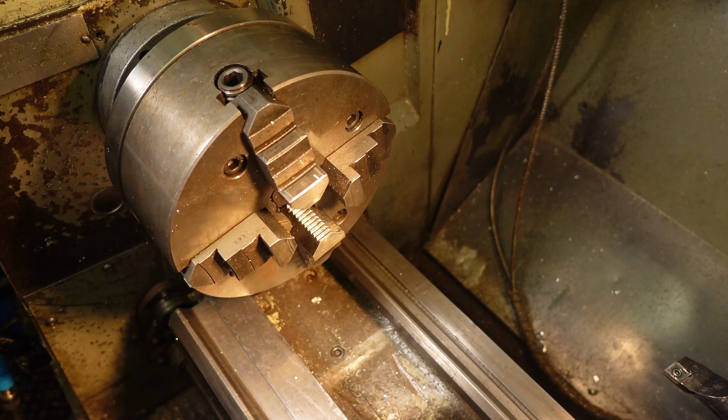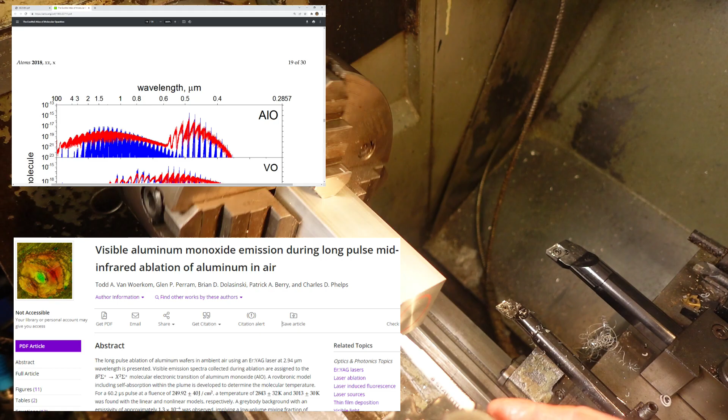Hey Amy, I need to remove a slug of material from a block of aluminium, but machining it all into chips seems wasteful. I've been reading these brilliant articles about laser ablation and aluminium monoxide vapour absorption with green lasers. This is going to be a sketchy quantum setup. I can tell already.

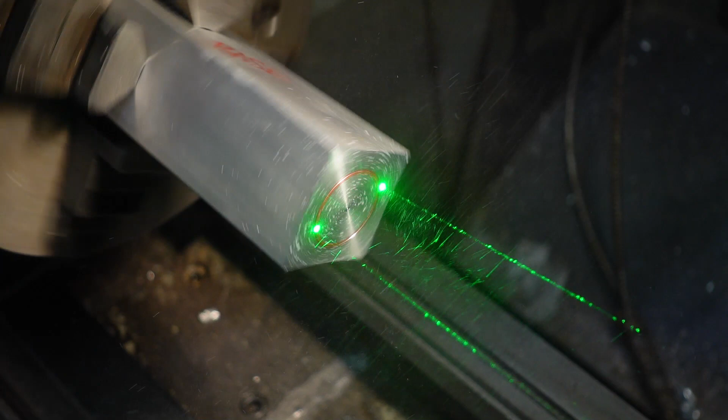Looks like it's working, but how do I remove the slug? I found something by Venkman, Stantz and Spengler from 1984. They say you mustn't cross the photon beams because it'd cause a total photonic reversal. That would be bad. I'm fuzzy on the whole good-bad thing. What do you mean bad? Try to imagine quintillions of atoms stopping instantaneously, causing violent rips in space-time. Sounds great! Realigning second beam now.

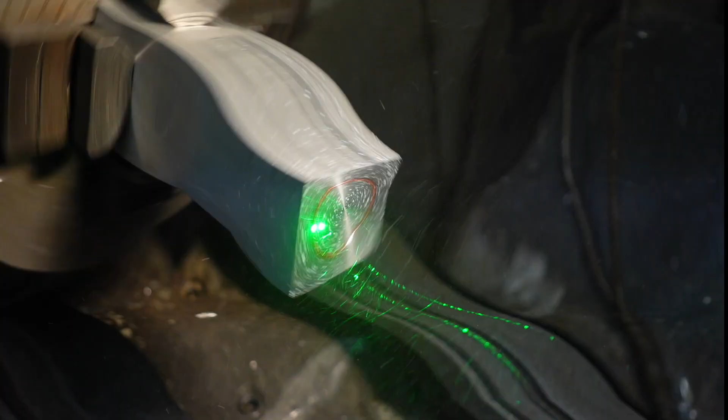What happened to the lights? Do I look like an electrician? Well, yes. Gender expectations, eh? There you go.

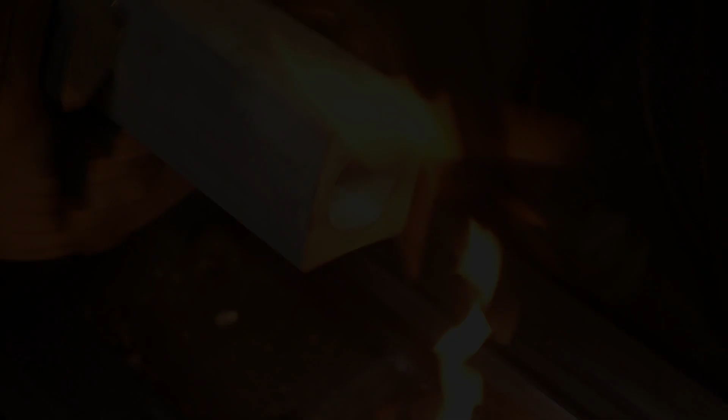Hey, careful, that'll be extreme. Ow! Hot! You could have warned me. The first aid kit's in... oh wait, you used it last time, so I don't need to tell you.

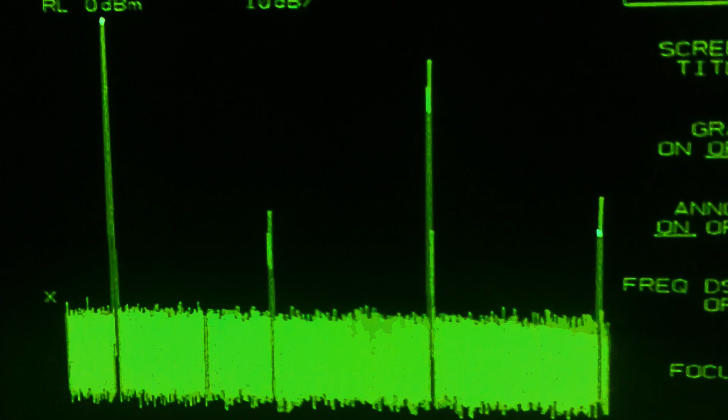Microwave transmitters generate some unwanted harmonics, so if I transmit on 1.3 GHz, I'll also put out signals on 2.6, 3.9 and 5.2 GHz. To block them, I need to make a low-pass filter.

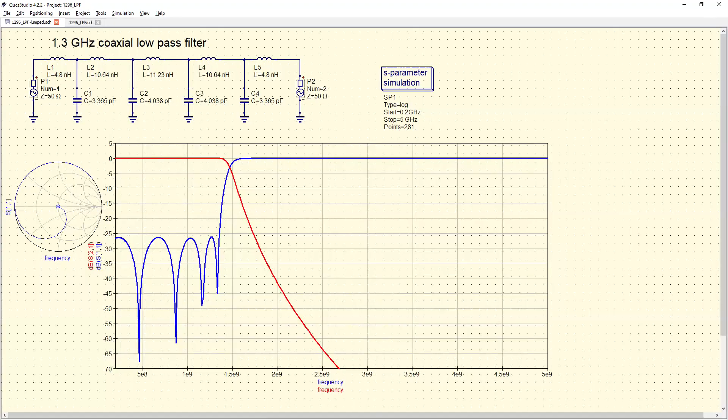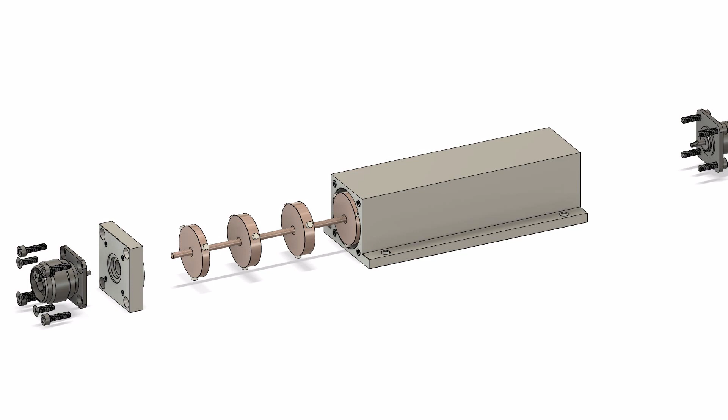At these frequencies, magical things happen with very simple geometries. The filters I'm making consist of an aluminium block with a machined bore. Classical low-pass filters use a set of inductors connected in series with capacitors to ground. At microwave frequencies, a thin rod in a tube looks like an inductor, and a fat rod in a tube looks like a capacitor. So we can use the normal Chebyshev design approach to get the values for the inductors and capacitors, but just use rods of the right sizes inside a tube.

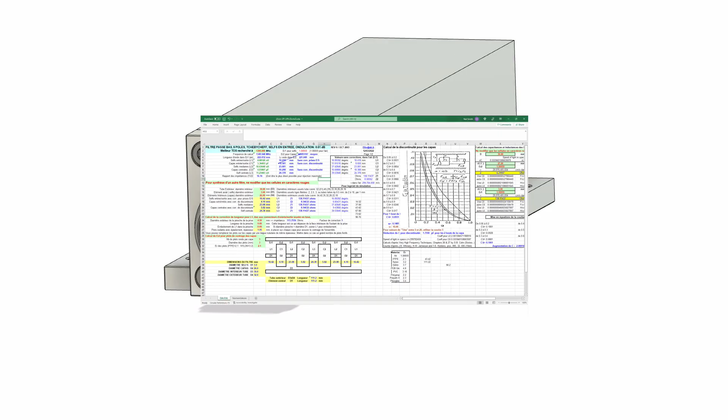There are end effects and fringing fields to deal with, but luckily Dominique F1FRV came up with a brilliant Excel sheet that does all the corrections. So all a humble microwave machinist has to do is make some discs of precise diameter and thickness, solder them to a rod of a suitable size, bore out a hole so there's a bit of an air gap, fit some lossless spacers and attach sockets to the ends.

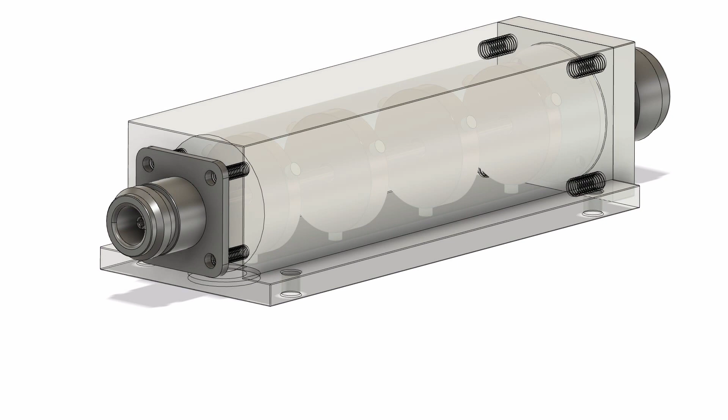Being of a somewhat nervous disposition, I put the dimensions into a Fusion 360 CAD model so I could check everything fitted and looked right. Also, it looks swoopy and cool and spits out dimension drawings for those of us not blessed with a Haas CNC machine.

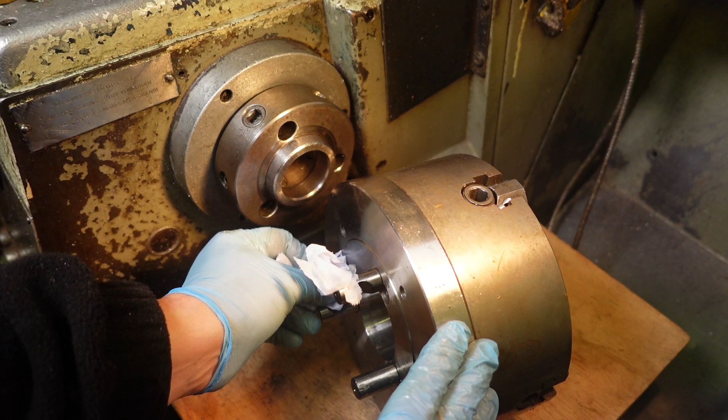I need one of those Lego cranes that Adam Booth uses. It'd be brilliant. Amy, I know for a fact that your voice synth is unable to snigger, so don't even try.

These camlock chucks are a bit of a faff to change over, but they're very repeatable and they allow full power in reverse, which is nice.

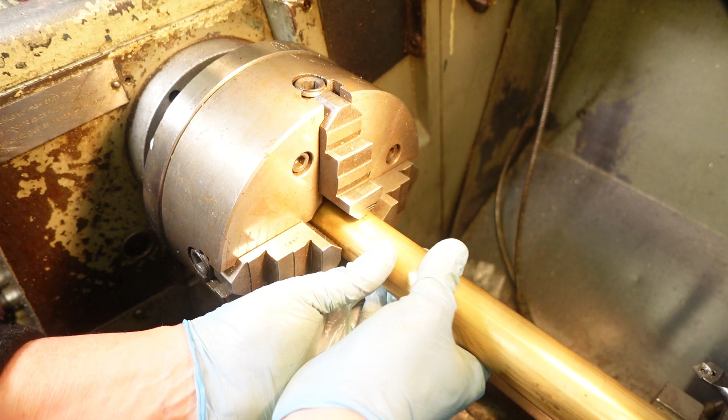One of us forgot to order some 30mm brass bar for this job, so I'm having to waste some bigger stuff. A new bar of the right stuff will be here in 3 days. Perhaps.

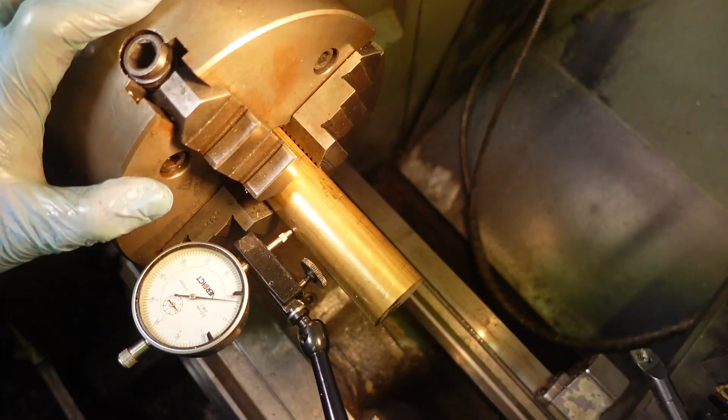It's probably not that important to get this bar centred up, but it's a big lump to have wobbling around, and I need the 4-jaw alignment practice in case I ever make it to the Bar Z bash. Collets are just too easy. Those ER40s are a gateway drug. I'm going to end up as a 5C user skulking on street corners trying to score some rubber flex. My name's Neil and I'm addicted to collets, but I can handle it.

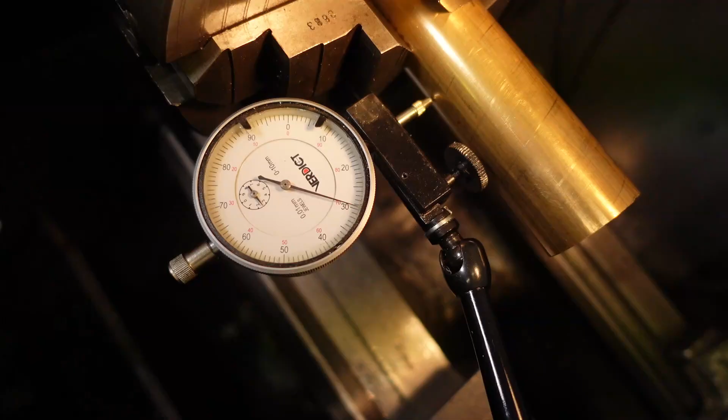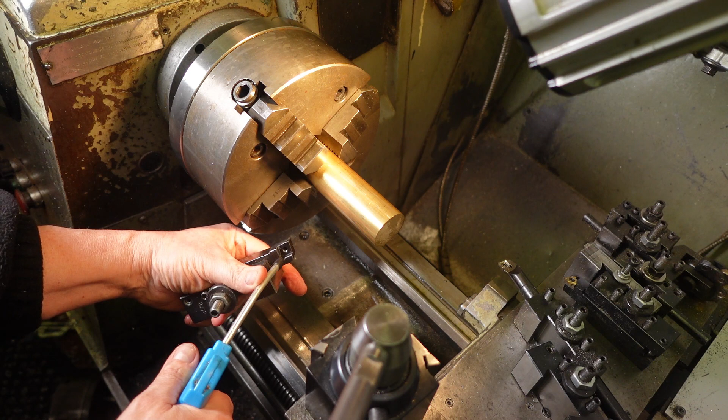Force of habit means I inspect my inserts with a jeweller's loupe before committing violence against metal. This one was janky as a janky thing, so I flipped it to give me a fighting chance of a decent finish. Talk about living life close to the edge. That's me breaking one of my cardinal rules and removing the insert screw over the chip tray instead of my usual nice safe magnetic bowl.

Shop looks more like a flipping film studio every day, nowhere to move.

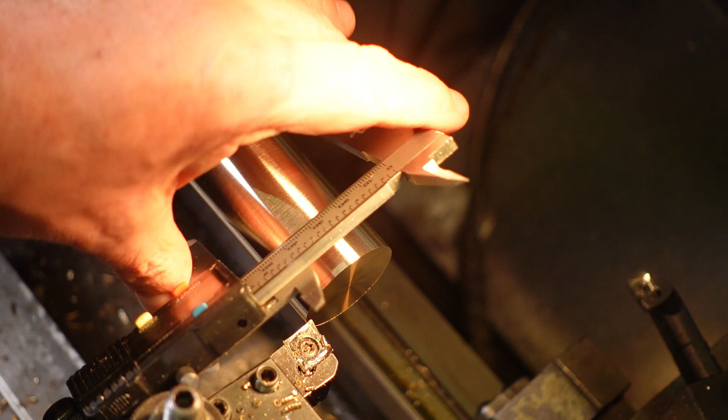These YG1 aluminium high rake positive uncoated inserts that I get from Cutwell work splendidly for finishing brass, but they leave a rotten finish when you take more of a cut. However, the chips are chips and not powder that sprays everywhere, so I can put up with it.

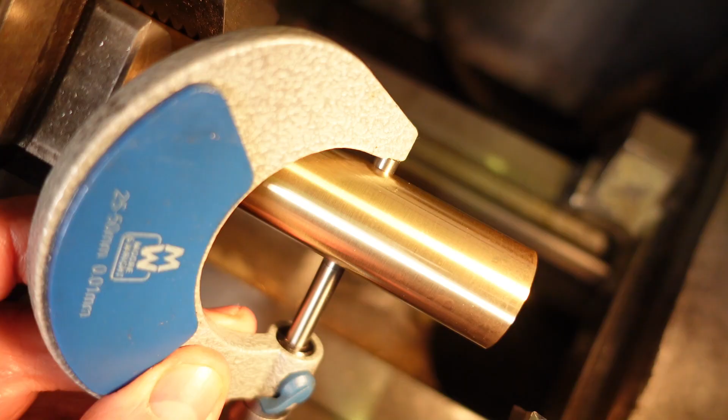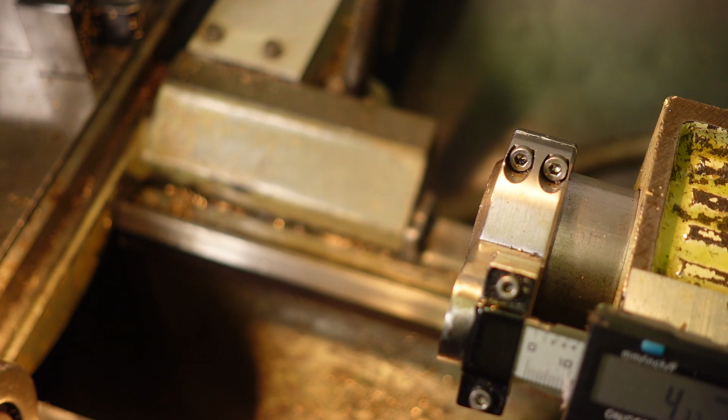Right, that's nicely on dimension for the diameter. Now I need to make the 3mm bore. Starting with a centre drill, then a 2.75mm cobalt jobber, and finish with a 3mm straight flute reamer.

This 3mm reamer's nothing special, it came in one of the better Chinese kits.

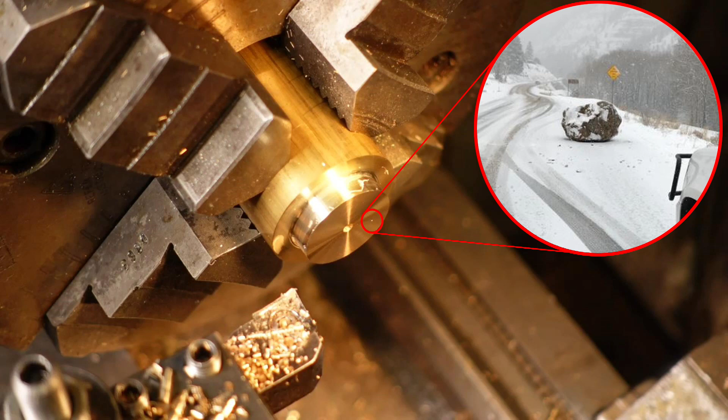First steps to clean the discs and chuck face with acetone, then apply a few dabs of high viscosity cyanoacrylate superglue and stick the disc to the chuck.

Someone's going to be thinking, how does he know how thick the glue line is? Well, dear reader, I measured it. I faced the glue chuck and zeroed the DRO, then stuck an oversized disc to the chuck, machined it to 6.00mm, then removed it from the chuck, made sure it was clean, measured it with my best micrometer.

Repeated that 3 times, each time 0.5mm less, because I'm like that. The average size of the disc was 22 micrometers less than the DRO measured offset. I tried to use roughly the same amount of glue and pressure each time. One day I'll find that fancy CA glue that contains glass microspheres that give a precision bond line thickness.

Time for some propane nightmares then. CA glue melts at less than 200°C and leaves the workpiece totally clean. All the residue stays on the chuck. Most convenient.

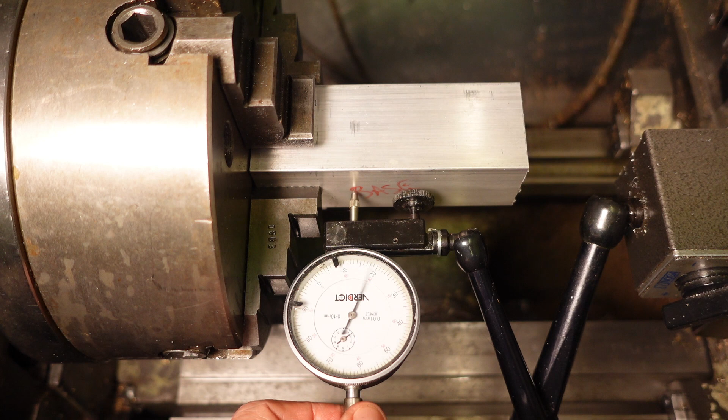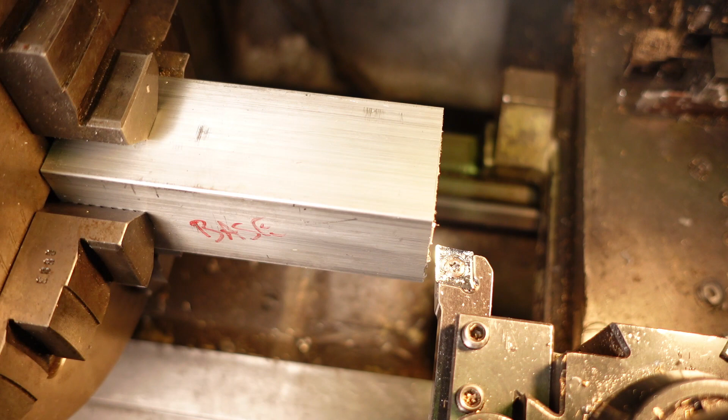And exhale. Nearly nodded off again there. I'll square up the end of the block to give me a reference surface to work from.

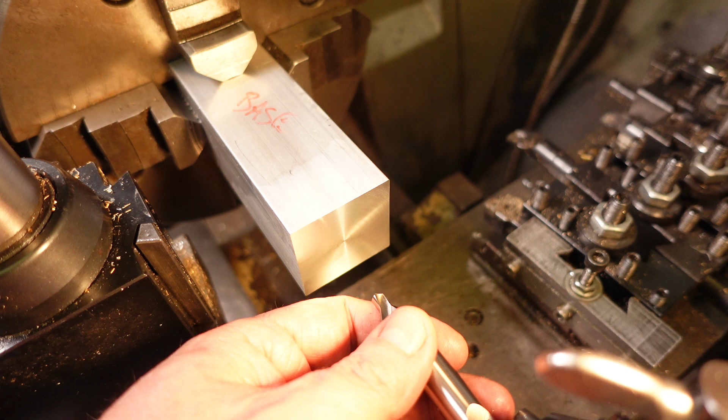I'm using this huge centre drill because it looks comedically large and makes me ridiculously cheerful. With the current state of the world, that's pretty impressive for a pointy lump of machined steel.

The finished size of the hole in the end of the block needs to form a 50 ohm coaxial transmission line with the extended end of the central copper rod and the solder spill. There's a logarithmic relationship between the surge impedance and the ratio of the inner and outer diameters. It turns out the hole needs to be 7.1mm.

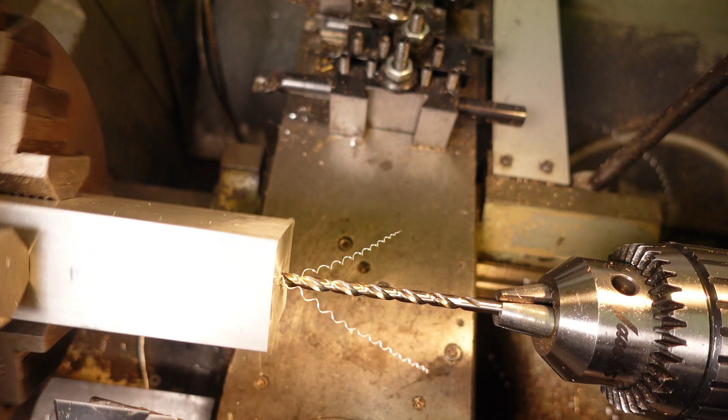I'm using a long series 6mm HSS Cobalt drill that I bought from Drill Service of Horley. It's not quite long enough to do the full depth, so I have to resort to some sketchy chucking later on. If that sort of thing gives you dyspepsia, you should probably avert your eyes. Oh, the horror.

Neil, that was a bit silly, wasn't it? Way ahead of you for once, Amy.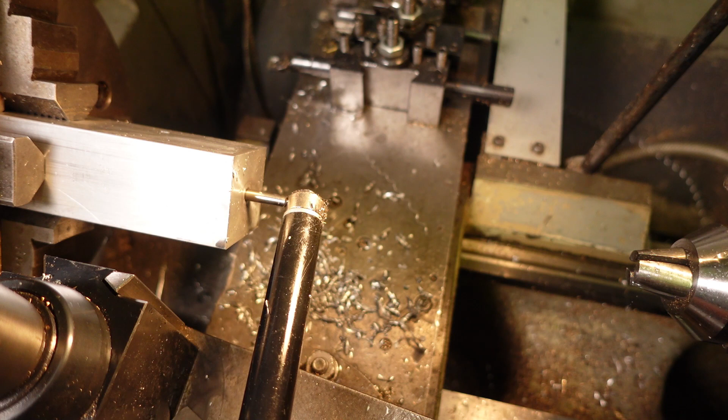The finished internal diameter is 30mm. This is a 5/8 UNF tap drill, 37/64, around 14.6mm. It's long enough, but of course the tailstock quill travel's 20mm too short, so I'll have to take special measures.

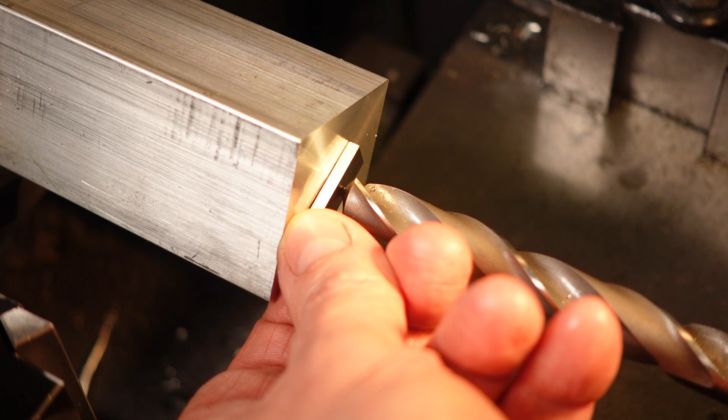Once again I'm using the cheap 3mm gauge block to set a reference position for the tool so I can measure the depth of the hole using my tailstock DRO. I zero the DRO scale with the block in place, then because I'm a bear of very little brain, I move in 3mm and zero it again so the tip of the tool's flush with my reference surface and I don't have to suffer my ultimate nemesis, mental subtraction.

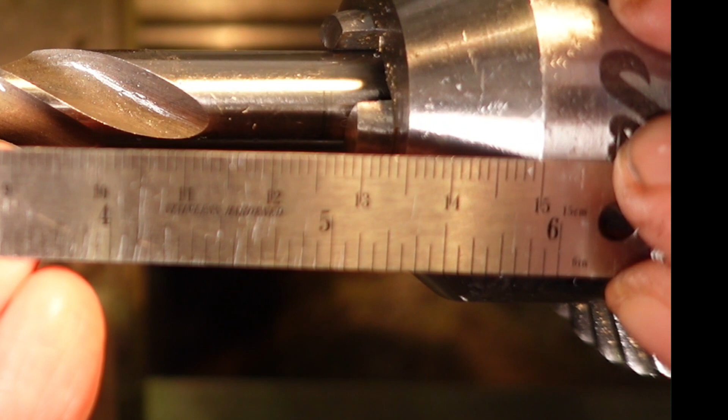At this point I put the gauge block in again and measured the distance from the workpiece reference face to the edge of the taper on the chuck. Exactly 150mm. Convenient. Could have been planned. Planned, lol, never.

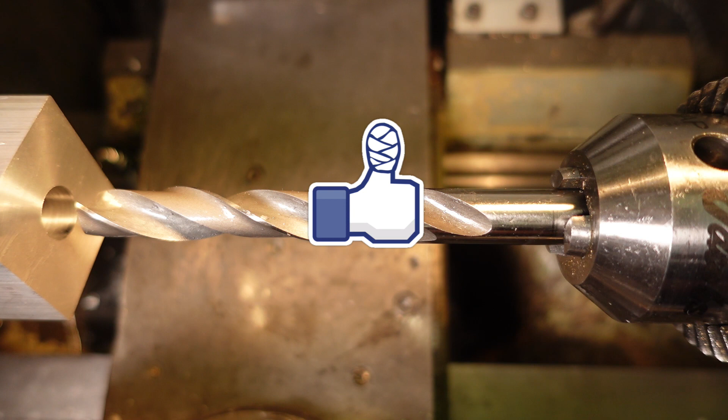I set the offset to 150mm and zeroed the DRO with the tailstock quill fully retracted and drilled the hole to depth.

Next on stage is the 1-inch blacksmith's drill. It's way too short to reach the bottom of the hole, but it's good for hogging out material in preparation for the big drill.

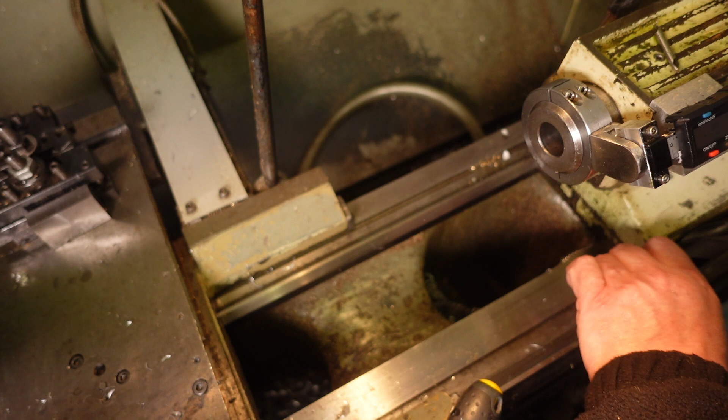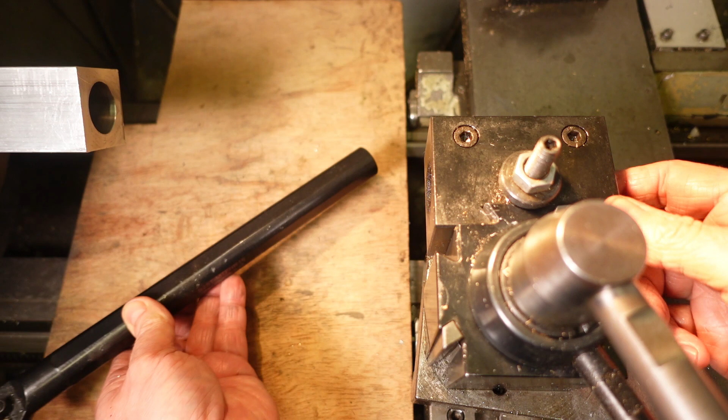I treated myself to another boring bar that takes CCGT inserts for doing aluminium.

Using a ruler balanced on the flat on top of the boring bar to align it with the holder is a bit rubbish, but it seems to work.

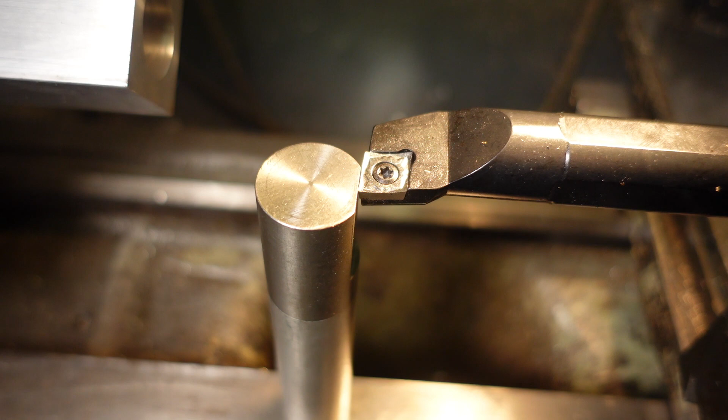This tool height setter was the first thing I ever made in this machine shop.

It's a terrible camera angle, but I'm just checking that the bar's parallel with the lathe axis.

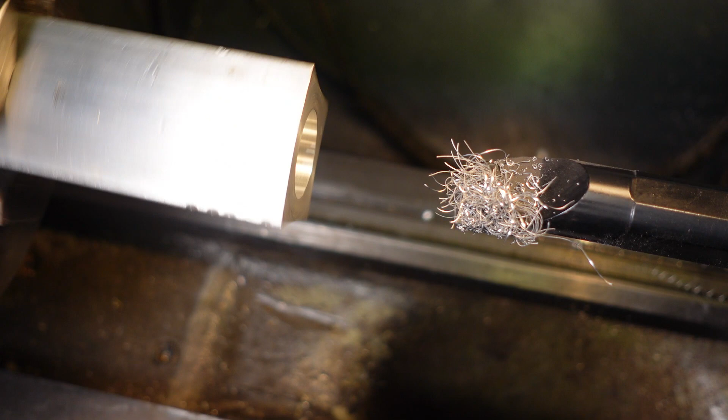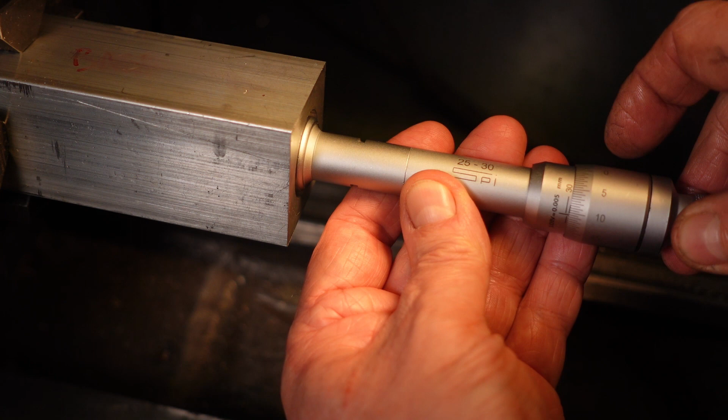A quick check of the bore dimensions so I can set the DRO. This SPI bore mic isn't bad at all.

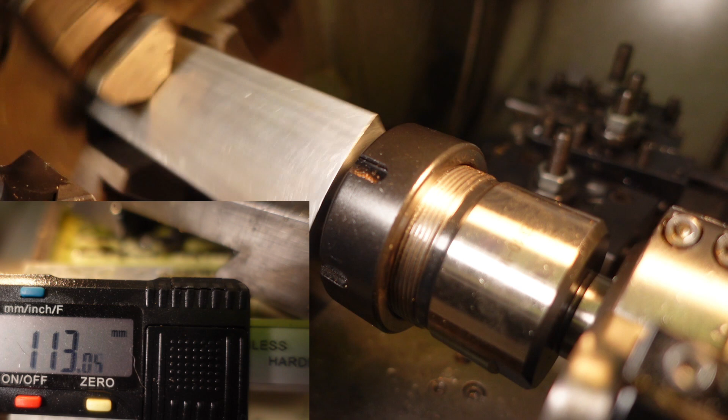Collets. Ooh. I can stop any time, right?

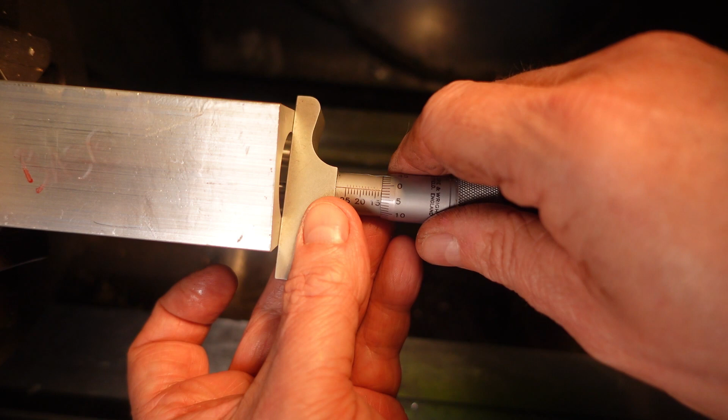The bottom of the cavity should be fairly flat now, apart from the central section, which was under the slightly hollow cutting surface of the end mill. The depth mic seems to agree and confirms that I'm within a very thin part of a proverbially thin thing of the desired depth.

That looks almost acceptable. Just about. Maybe. Perhaps. High praise indeed.

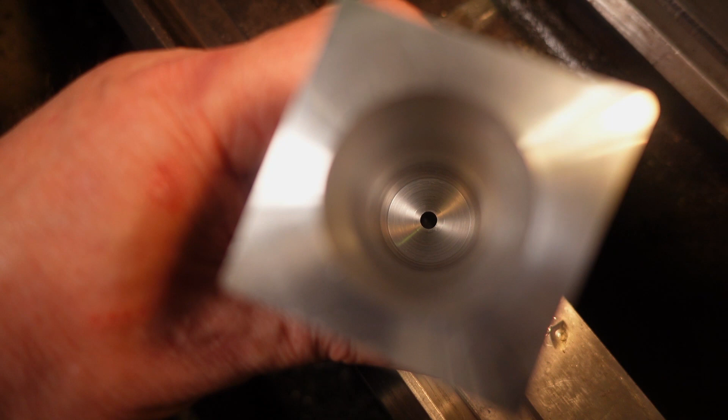Bob Corley taught me how to use two dead centres to check the alignment of a hole in the end of a workpiece in the long hot summer of '76. Different century, different world. Or was it? Same old fuel crisis, wars, threat of nuclear Armageddon, and me mucking about on a lathe. Plus ça change, plus c'est la même chose.

Although the alignment of the hole is reasonably good, I'm using a very stiff 6.75mm stub drill to open up the hole before drilling it to the finished size with a jobber.

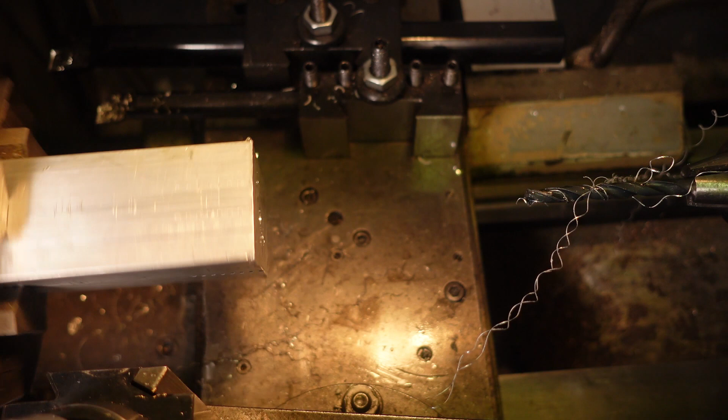Next on the agenda is to face off the end close to dimension, then measure it with a depth mic. Actually, I use the DRO as well, but hey, the traditional ways are reliable and gorgeously tactile.

The length looks good, although the controlling dimension's actually the depth of the board cavity. I'll adjust the step height on the end cap when I make it just to be sure the cavity length is within tolerance.